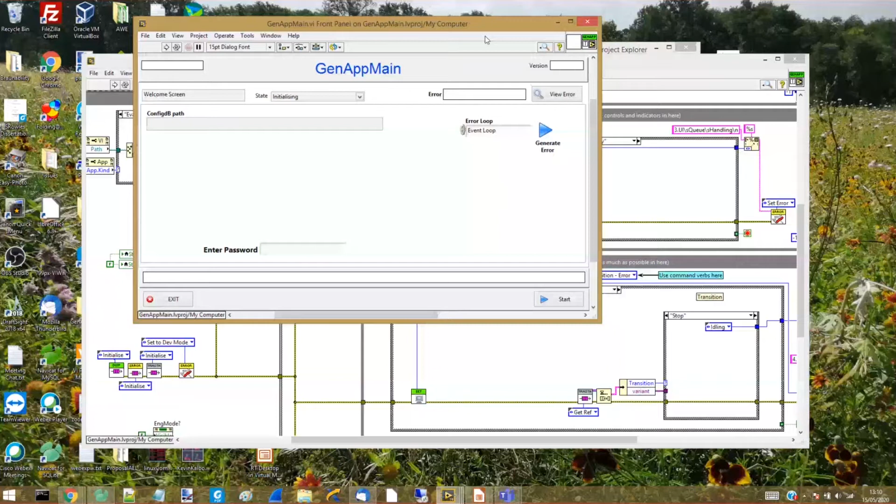Hey, demo time. This is all going to be demo now. I don't think I have any other slides. So I'll just run through the different bits of the code, really. So you start off with a reasonably small screen, just because I find small screens are easier to make bigger than big screens are to make smaller. So I think I'll just go through the various structures of it, and I'll probably then display, if I can, how this scales, because that's quite a common question I get. Oh, you're using standard LabVIEW, how does it scale? So I've got some very big applications which I can sort of show you.

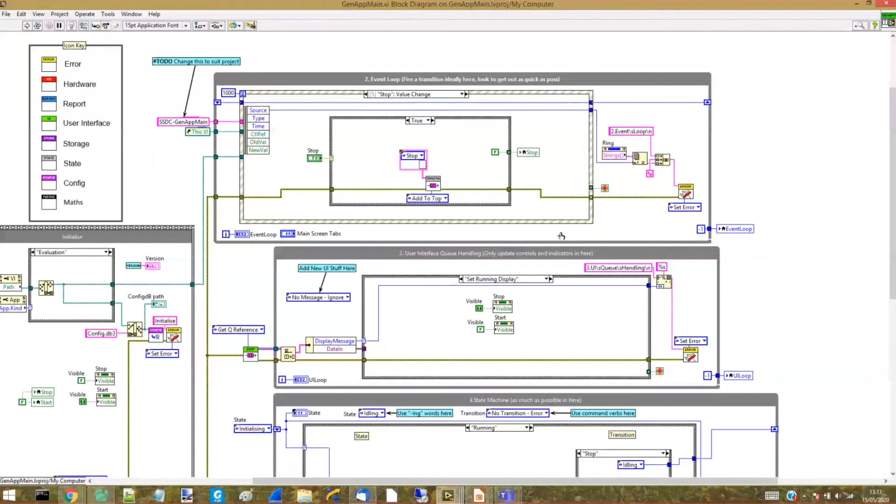But essentially, all of our stuff, we try to have common iconography. We try to keep the numerics. So these are just coding standards, really. Having structures with numbers on is quite useful for phone support, I find. The blues are kind of telling you what you need to update to modify.

I've fairly newly found that there were issues, so it's good to encourage best practice. For event loops, I think best practice is to get out of there as quick as possible. You don't want it hanging around in the event loop. Ditto the user interface queued message handler - get out of there as quick as possible.

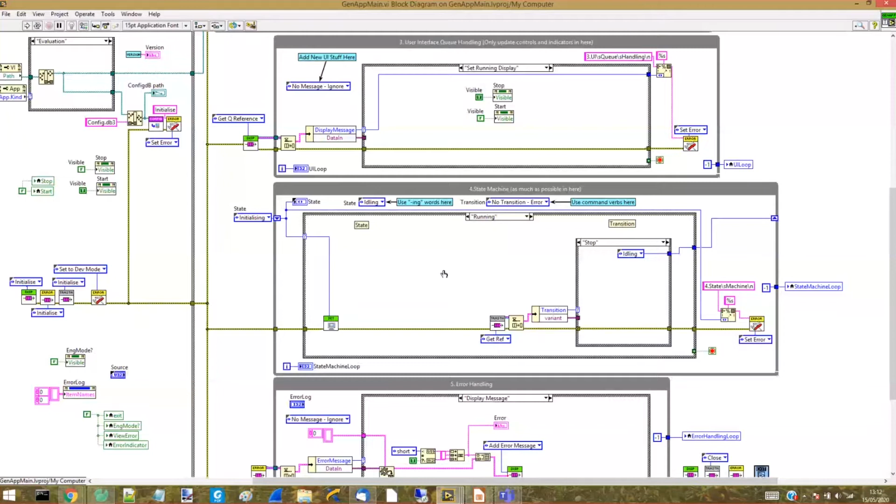And error handling just sits there as another queue. So you see there's 3 main queues here. There's a transition queue to come out of the state machine, which I talked about extensively at DevCon - if you're interested, go look at the videos, or I'll talk about it in a minute. Error is just another handle errors, and the display queue is just another queue. If I look in there, each one of those is structured the same.

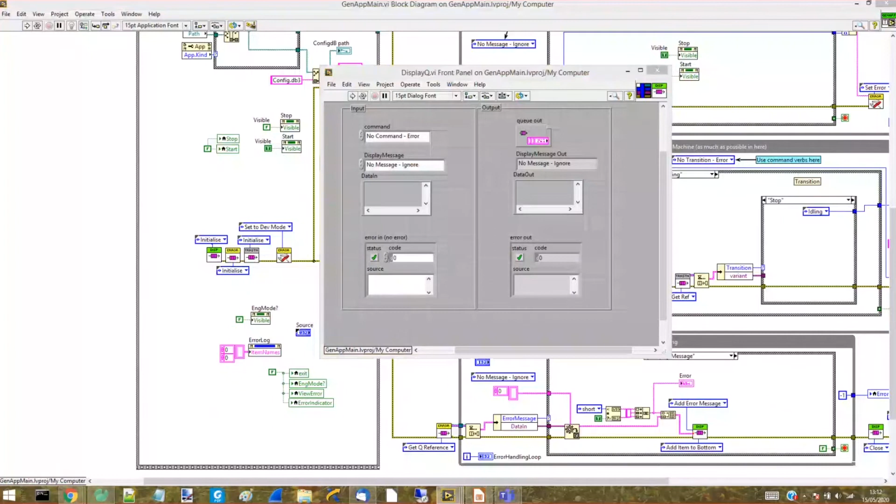I don't like seeing references on the code, so all these references are wrapped. You can see this is just doing queue stuff - all I've done is taken the queue prims and wrapped them up. So you can see here I try to minimize what references are around. To my mind, they clag up the block diagram with information you don't care about.

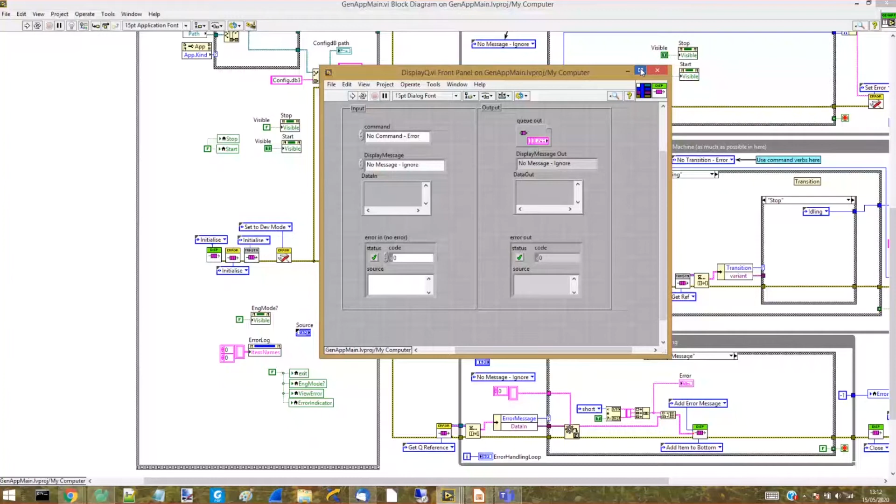So again, I'll do it - actually it's a working demo. Let's have a look at error handling first, because that's kind of vaguely interesting.

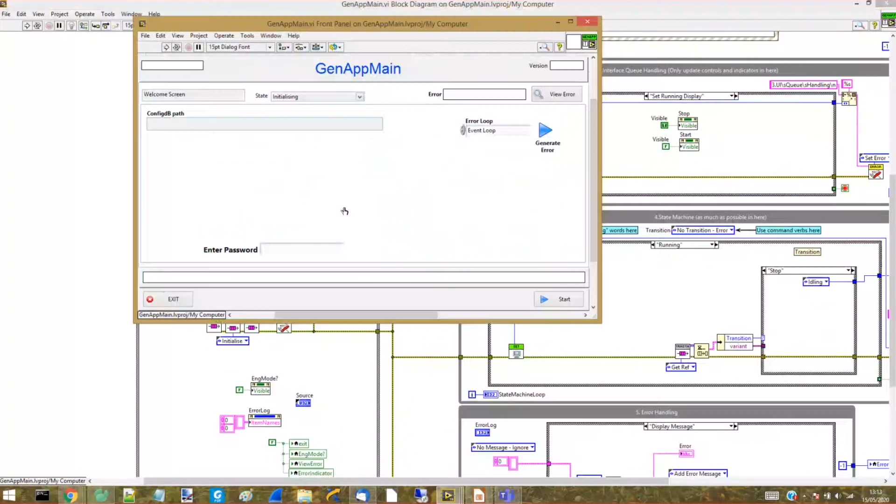So if I run this, that is our SQLite file. Our SQLite file handles all configuration and error logging. And if I press generate error - these are just fake errors essentially. So if I generate... right, there we go. You have to have an error come up, so you can view the error in a minute.

So I fired three errors off - actually I fired 4 errors off. I just give you the time of the error. But you can also have a look at the error history - these are stored away in our SQLite database, which I'll show you now.

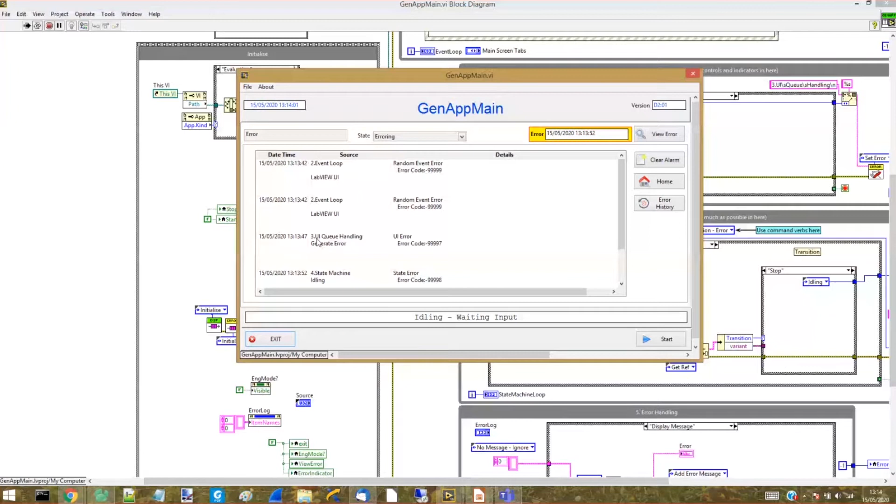I use Navicat to look at SQLite, which is cool - it's a cool tool. There's our error log. All I'm doing is taking the error number and its source and just totting up the number of errors and the most recent error.

I always think it's a source of extra memory leaks if you actually log every error into a file - it just keeps increasing. So what you actually need to know is, -99999 is throwing up 50 million errors, it's doing it all the time. That's all the information I kind of need. And it can be doing this in the background all the time as well, which is nice.

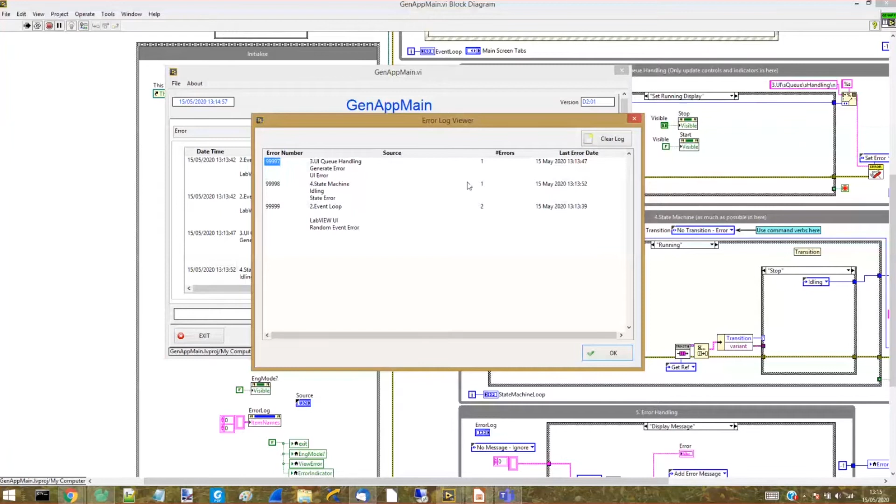So you can clear the alarm, and go back to where you came from, and that one actually clears, looks at the error log. This is actually pulling it from the database, so this is immediate, and this is forever - so until you clear it. And I'll clear it - it's all gone. So all that functionality is in there.

I'll show you that in a sec - actually, no, let's show you it now. Let's do configuration next, because they're fairly related - I can get both of them out of the way quite quick. So again, configuration, SQLite.

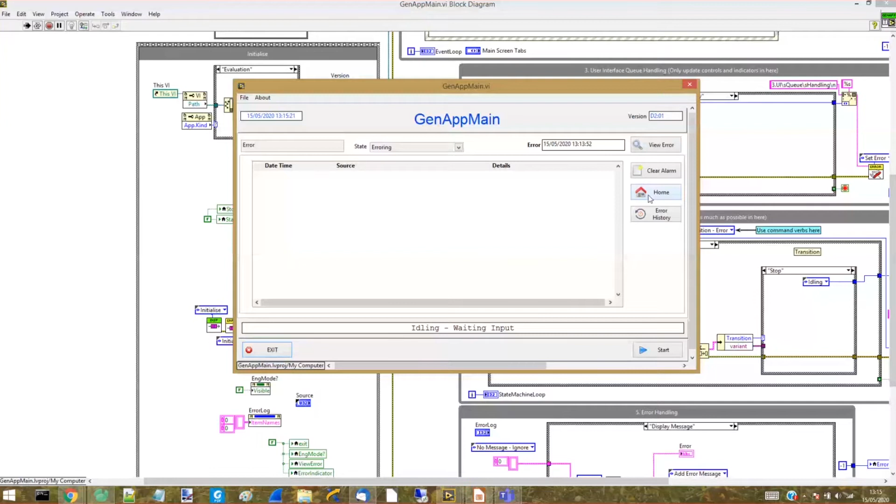You get the user interface - it's a bit of a clunky user interface, but it's all right. And the good thing about using a database for your configuration is you can have versions. It's nice, because it means you can do quite funky stuff like have different hardware setups, for example. Just load versions in - you select your version, lock it, that's always going to be the version that's used. Save it.

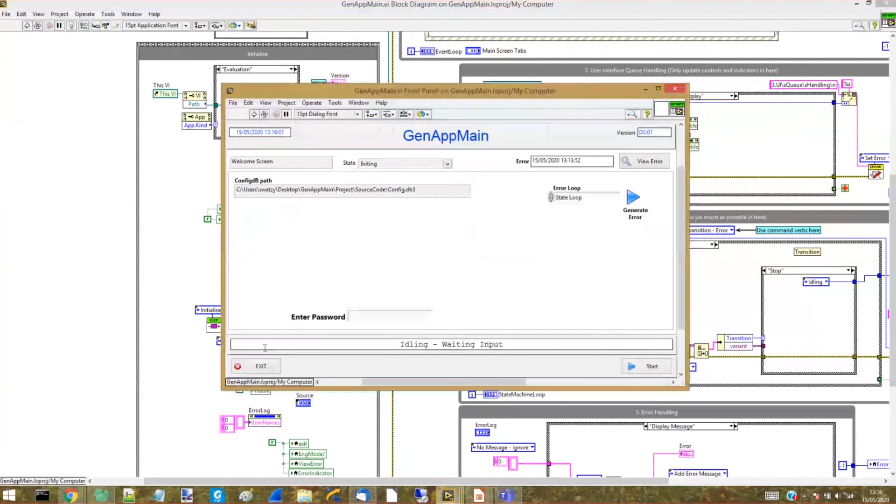The other usability aspect of this is - let's kill this code. You can actually then go. So if you want a new parameter, just open the strict type def and add a new parameter.

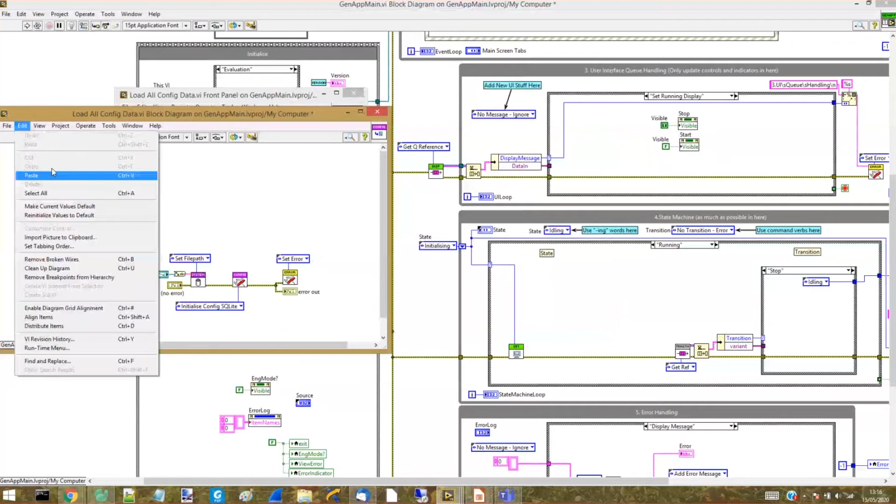So I'll go into here, I'll go save as because I'm adding a new one. It should give me a new version - there's a new version put in. I lock that, press OK.

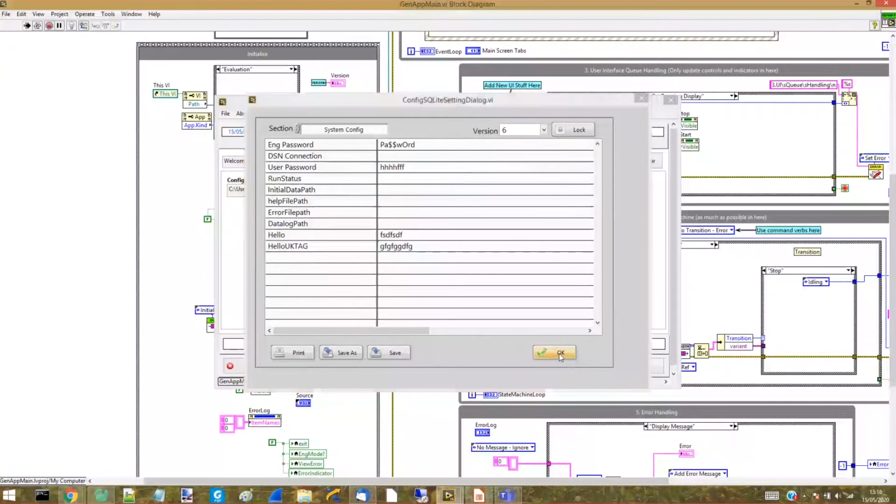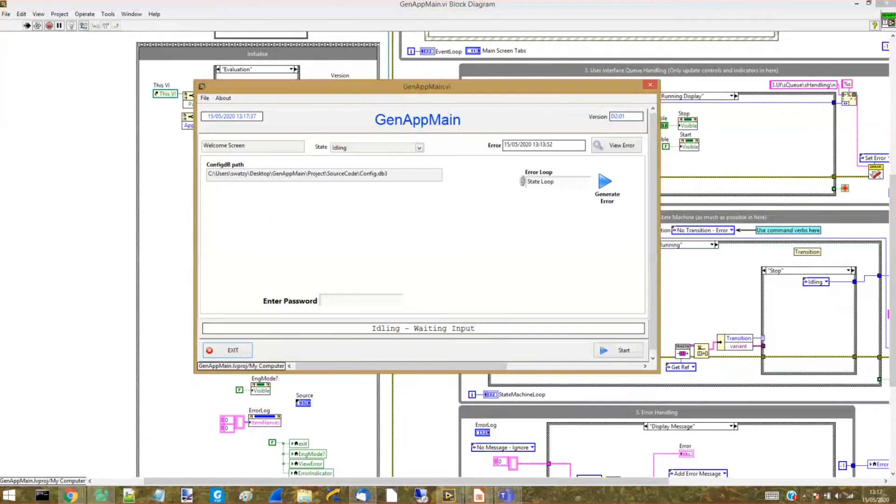Database... no... somewhere is... oh, there is there, version 6. UKTAG - so that gives you kind of, it's like a config ini file, but I find SQLite to be very much more robust and more transportable and stuff like that. So that's configuration - that allows us to just chuck up new bits of configuration on the fly, which is, you know, if you've got constants in your code, it's quite a good idea to make them configurable.

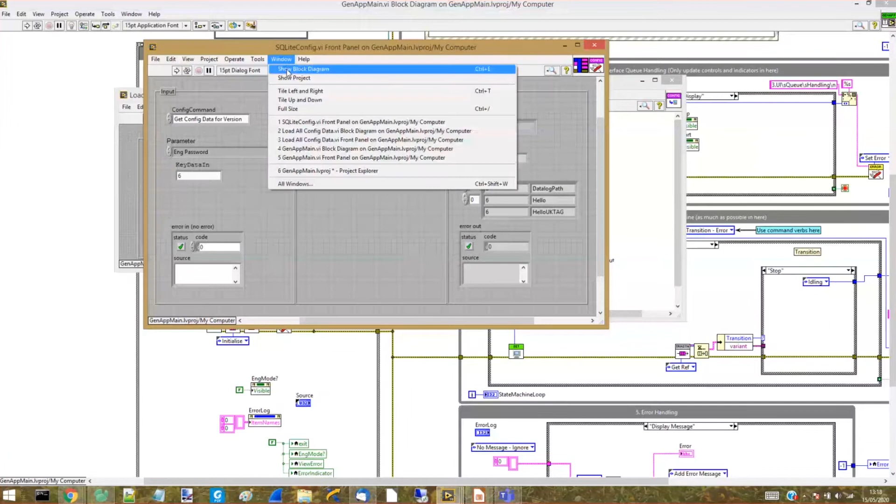This is essentially our database stuff. Again, this is fairly high level. The abstraction is more to do with the template than it is to do with databases.

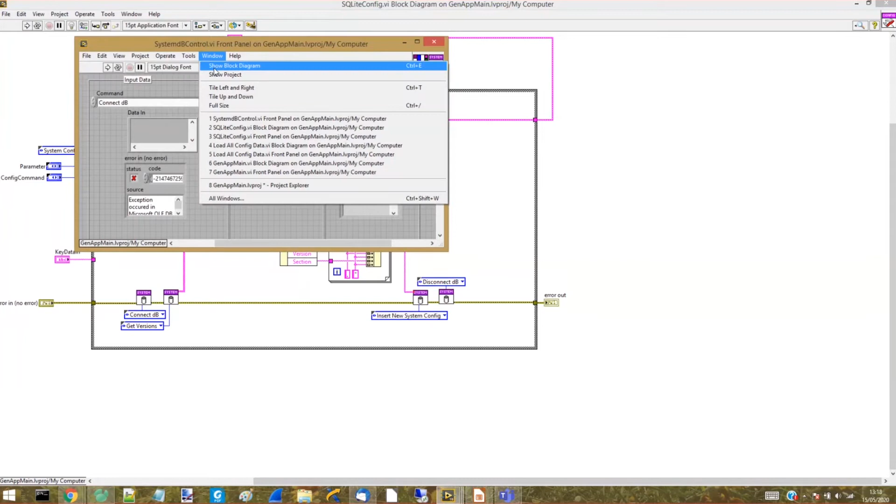Let's get a little bit more databasey, so we dig down a little bit deeper. I quite like doing these kind of things. SQLite is good, there's good documentation for it. And here's the actual SQL. So here we're doing SQL inserting.

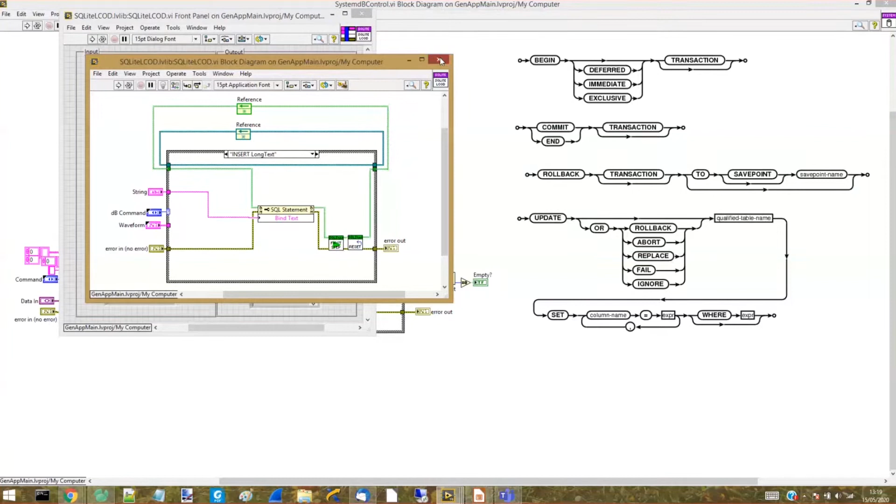This is using the final layer before we get into actual driver code. This is using James Powell's tool, SQLite tool, which is fantastic. You can see here it's actually binding it to the text, so it's doing binds rather than SQL. That's just because it's a blob, because it could be big, and it's also got error details which could have lots of characters you don't want, or if it's a SQL statement that causes the error, you don't really want to embed SQL statements in text, so that kind of thing.

But other things don't use that. I try to always go for the most simple way of doing stuff, so select all. It's all reasonably standard.

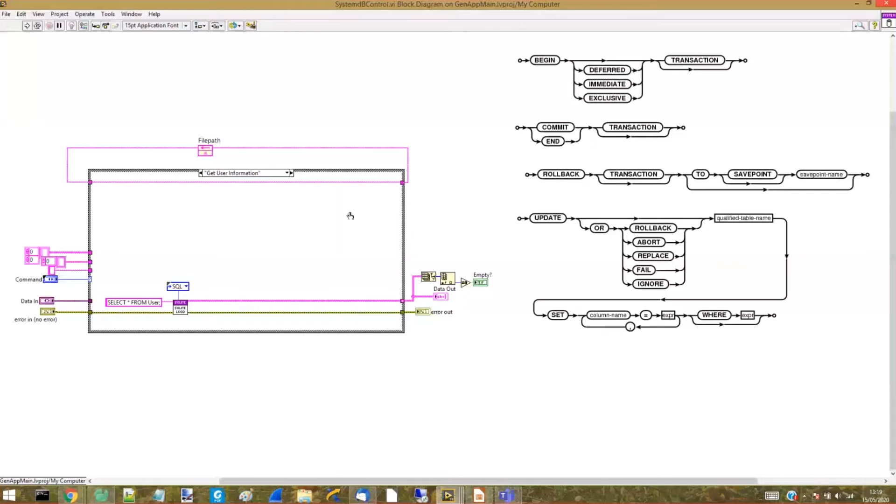So that's configuration, that's error handling. I've done the two most complex things first actually, so that's cool.

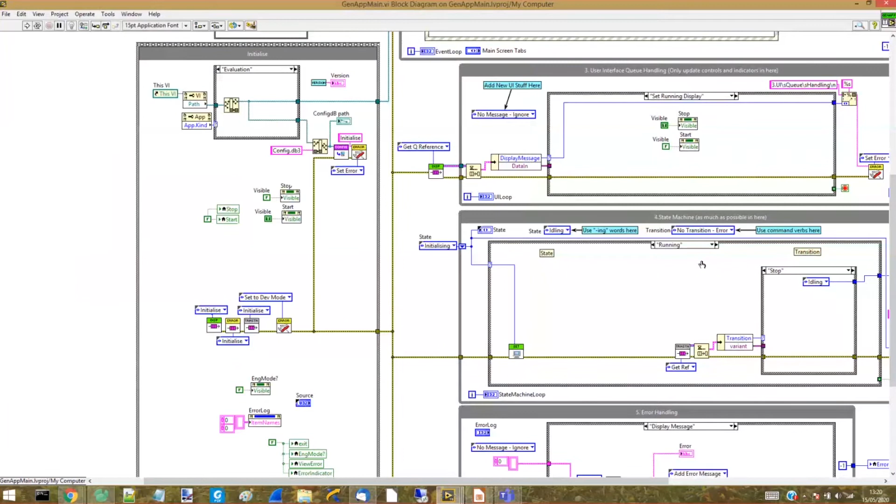So why would you queue up all the user interface stuff? Let's talk user interface stuff. So what's the point of that?

So here, again, I like enumerator types, so you'll see lots of that. Here I'm setting my display, for example, to idling or running. So you set running, all I'm doing is making the button visible. That's the only thing it's doing currently. But that could be a generic thing - you could be flipping a tab, which is a common thing we do, to a running screen.

But if we play this here, I press start, stop. What we're doing, you should see me.

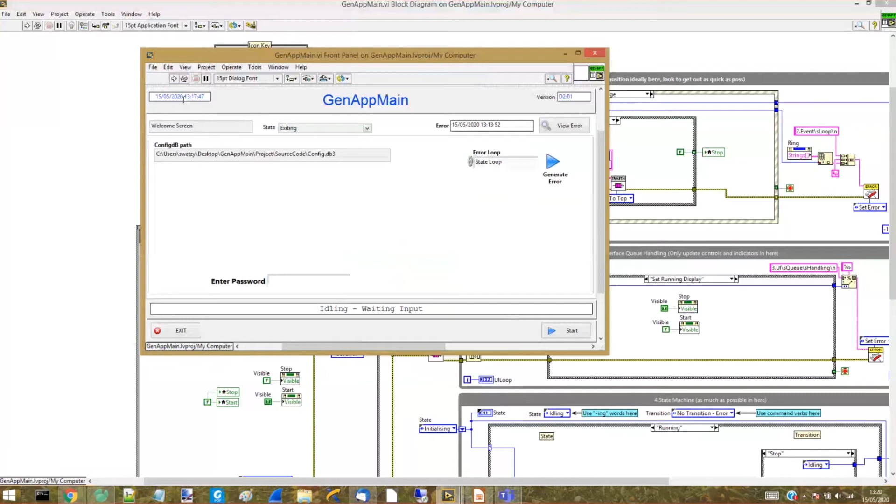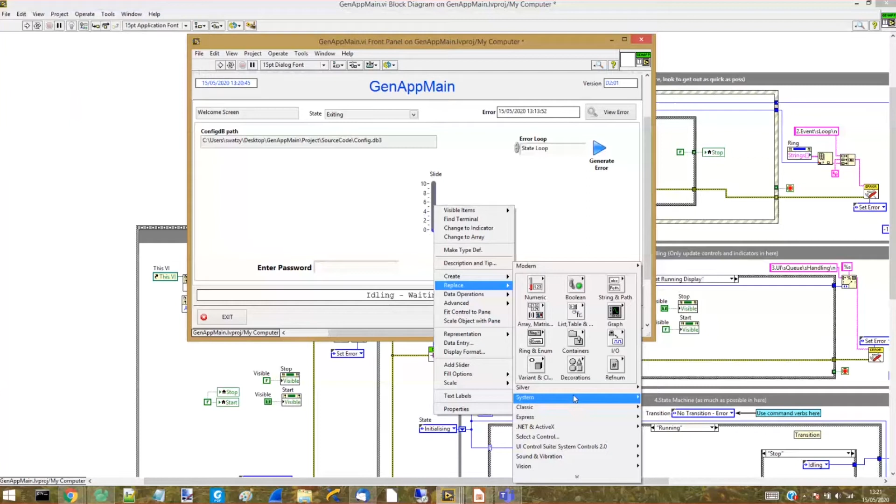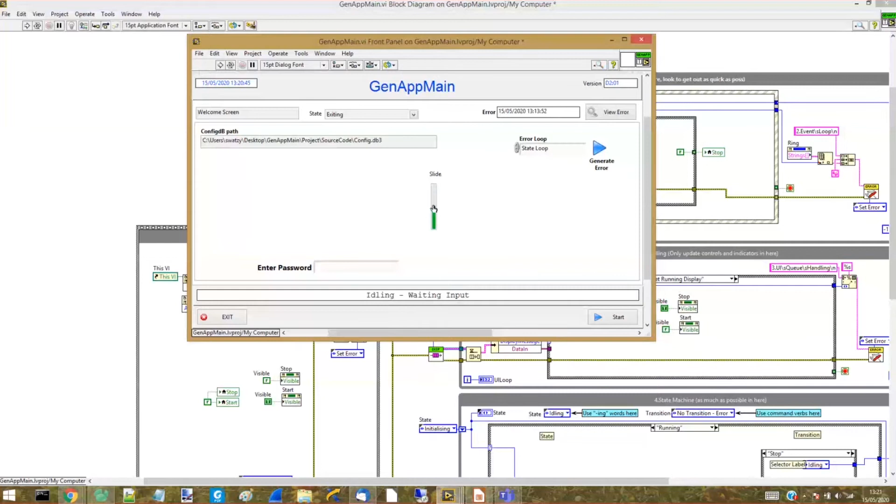Okay, so we got a new indicator, which is slide. So what we want to do is update that. So I would go the simplest form. I don't like this because auto cocks up in a normal way - my muscle memory works, apologise. So let's go set slider.

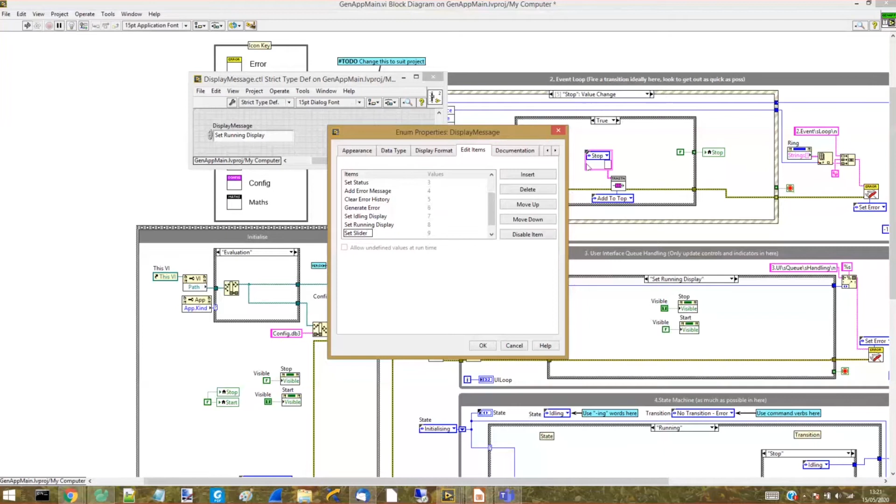And as we're going to set him to a number, let's just go and copy something that's already got there.

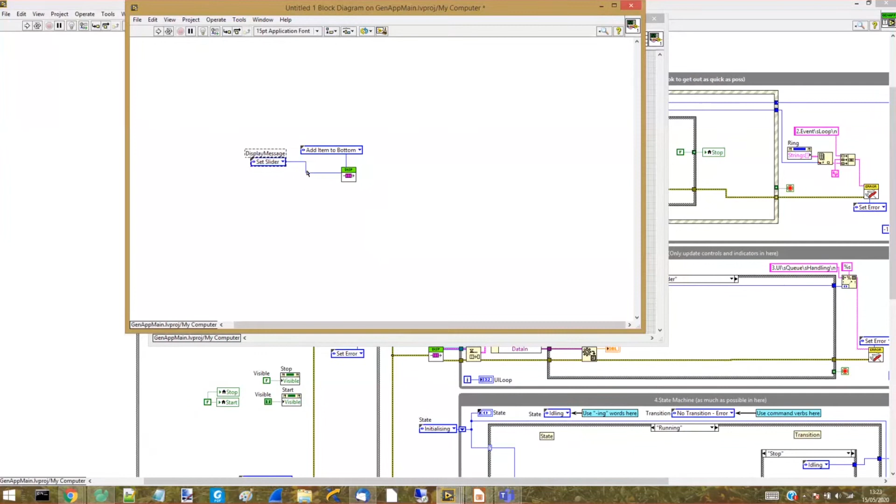I find this quite valuable when testing displays, so this could be in any old sub-VI, anywhere in your hierarchy. But now you can just test that your display works. That's as easy as that. It's cool.

The other nice thing about the queue template is you can add to the bottom or the top, so your stops get added to the top. So you just say, right, I'm out of here.

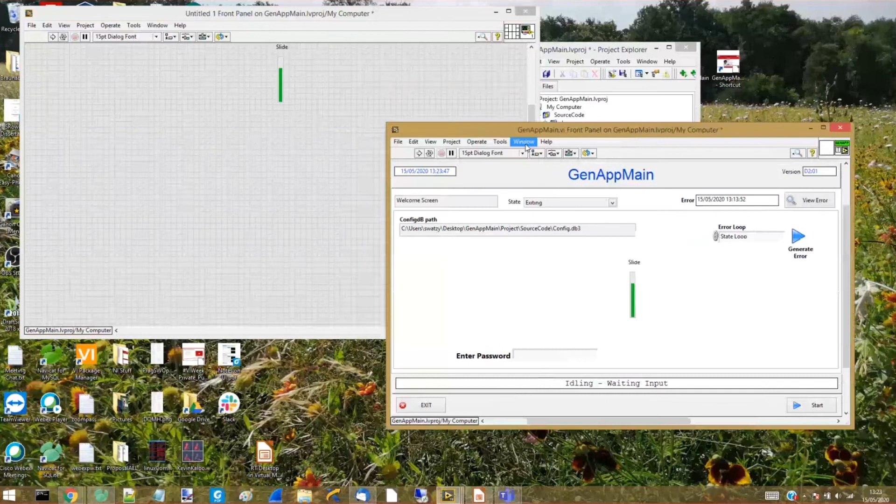Okay, state machines. So you can see I'm very keen on state machines. I'm very keen on having it tell you what state it's in. I find it very much easier for me. So I've got the state up here. You can see I'm very keen on the language of state machines, and that it should be idling. That tells you precisely what your system is doing or what the module is doing, because state machines can be...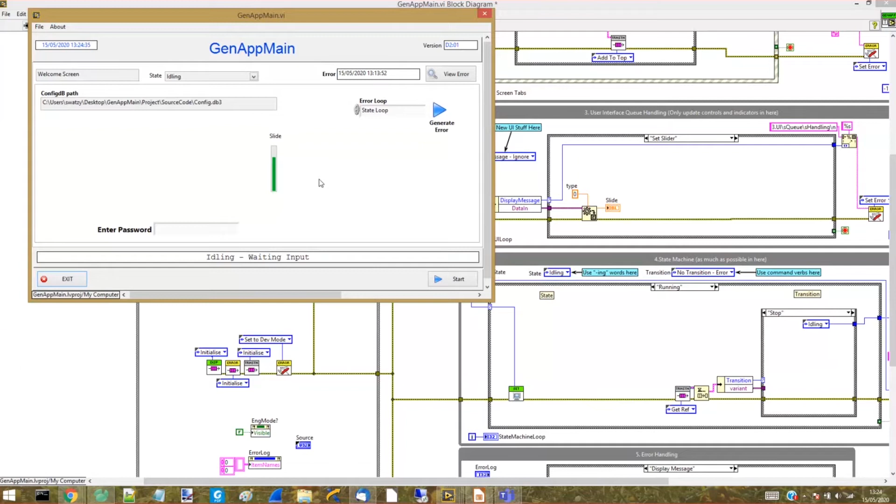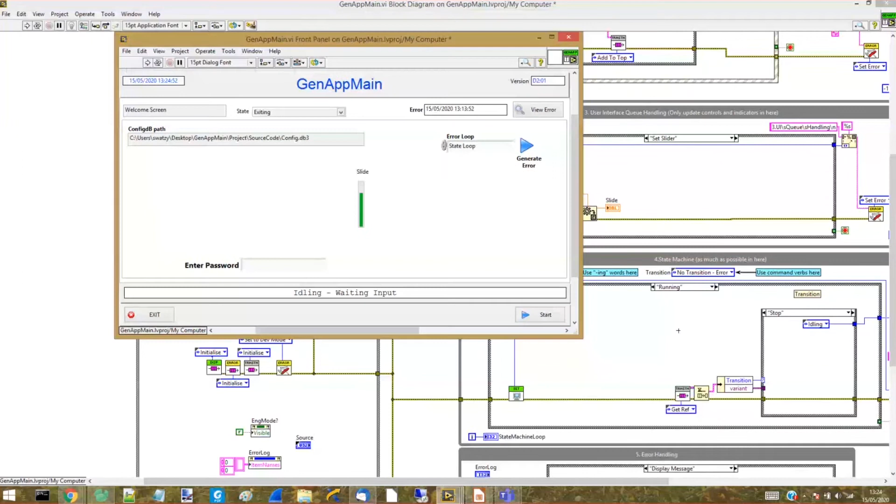...sub-VIs as well. So here I know it's idling. Now if I press start, I know it's running. So it tends to lead your mind into the correct place. Now what do I have to do when it's running? It tends to, what I'm trying to do, is force my brain into thinking about the things that are happening at that one small moment in time. It's a way of managing complexity - rather than thinking about how the whole program's running or working, I'm only doing it in one small bit.

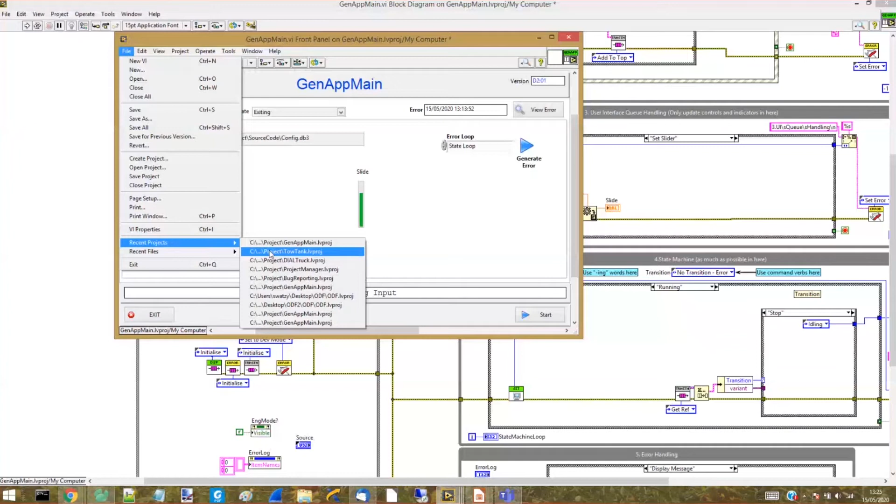So, I think that's all the ins and outs, all the technical aspects of the code. And you see it's not very big. Let's have a look - so if we get rid of the driver...

The other thing it comes with is transparencies and things like that, splash screens and all the frivolities that you can have. If you take out the actual driver, there ain't a lot to it, which is nice.

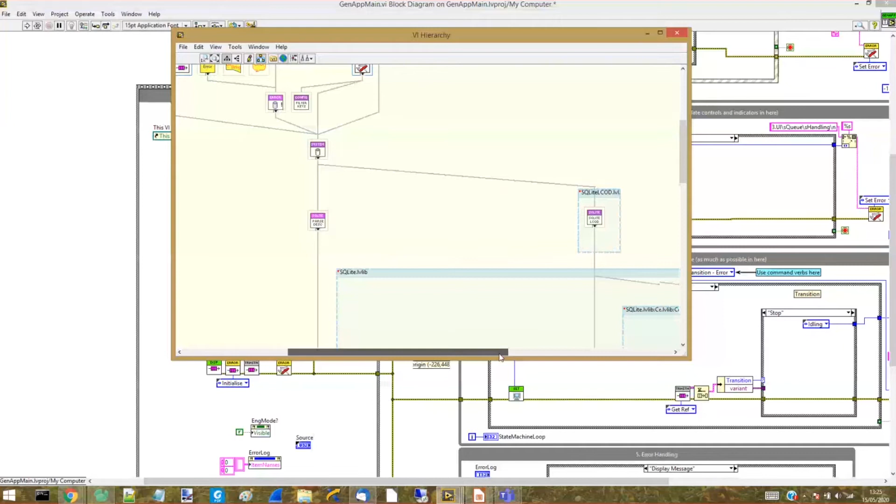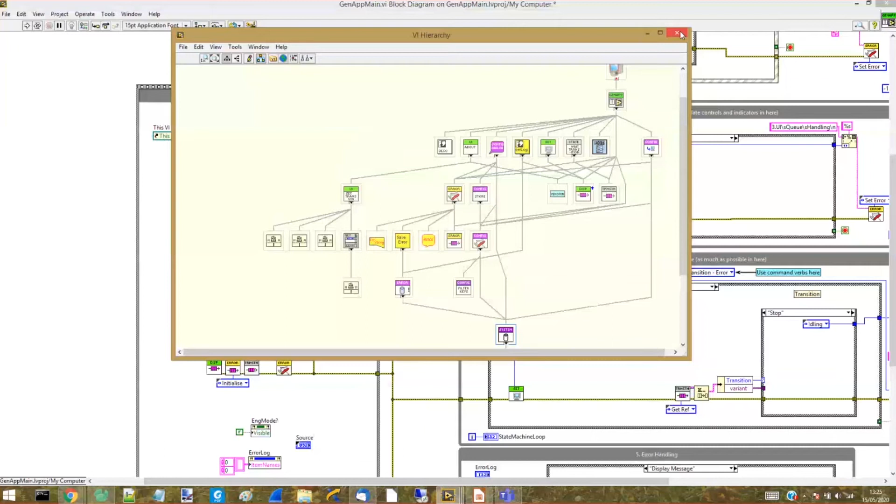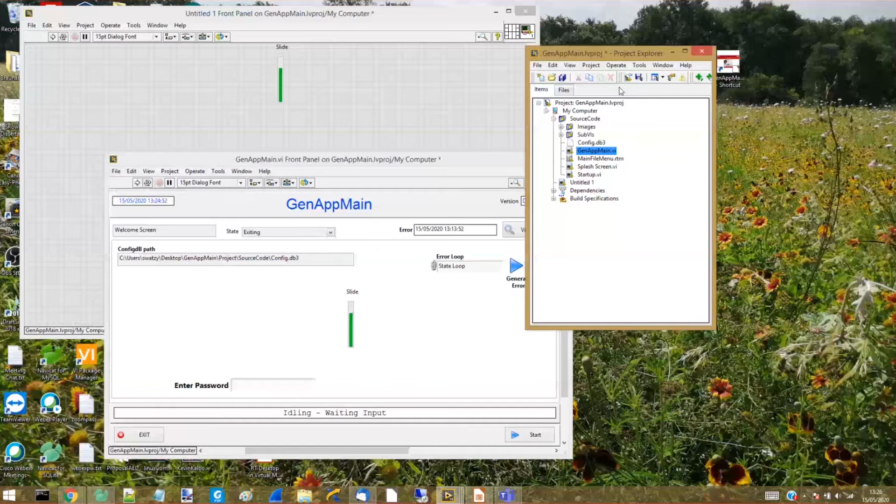I've recently stripped it quite a long way back. The other aspect is it's completely portable, so you can move this to any directory, chuck it on any machine, there's no dependencies. It'll just run, and that's important. There ain't no dependencies apart from the VI-lib, which you can't get away with. But I'm not a great fan of dependencies.

This is another rule I break that seems to infuriate people. I don't really care - I quite like infuriating people - but I like to see when shit changes in my project, so I always have it directly mapped back to the file. I'm always auto populating.

But if we go into there, there's James's stuff. So every single project I make has that embedded in it, and I tend to do that with drivers and everything. So hardware drivers, if I can, I'll embed them in the source code. And all I then do is park it up to one repository for the project. The aim is that if I just gave my repository to anyone and they loaded the right version of LabVIEW, they could just download it off the repository and it would work.

Now obviously, with, I don't know, if you've got a Keysight scope for example, that's next to impossible unless you want a 5 gig repository. But it's an aiming point.

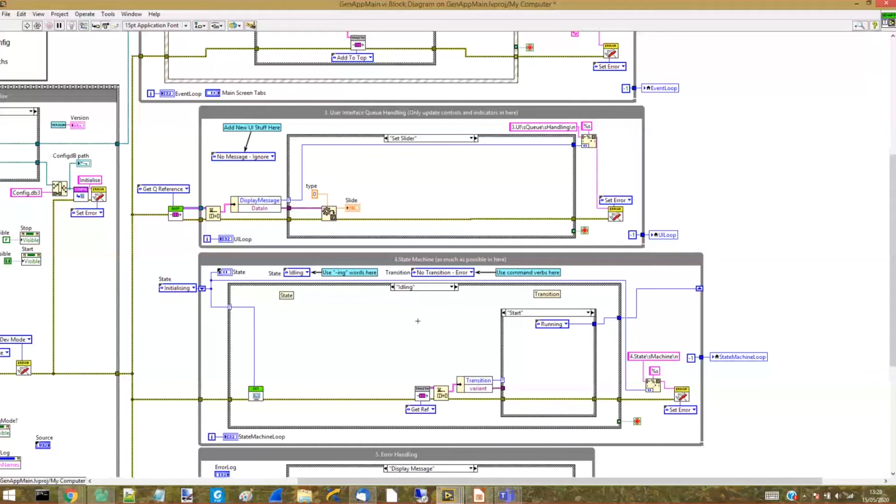The only annoying thing I find is that over time these just randomly expand. I'll try to fix that one, but it's a minor thing. Apart from that, that's well.

So I was going to show you something a bit more complex now, because of the interesting way that Measurement and Automation Explorer deals with - can't think of my words today - deals with instruments that are imaginary. I may or may not be able to show this. Oh no, it's going to work today. Nice. Simulated, that's the word, there you go.

What it does is it changes the name of them. It's very peculiar.

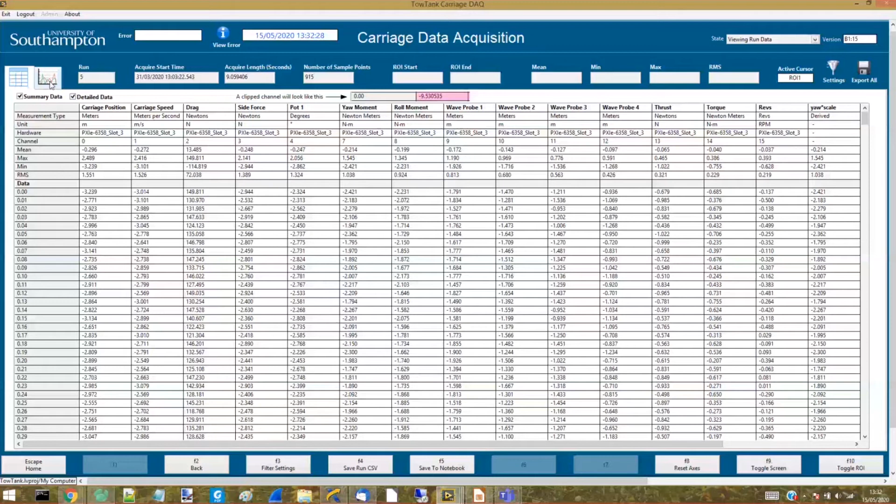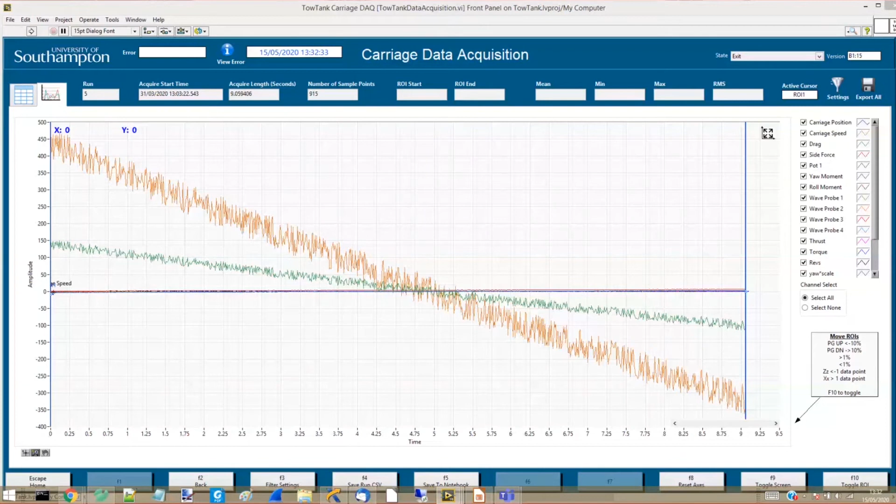So this is a big ass piece of software now. I'll just show you the code - you'll see it's following pretty much the same pattern as I showed you. It's bigger and assier, but it's still there - event loop, user interface queue, state machine, error handling. Certainly the same structure, it's just bigger.

The other aspect is if you want to do a real-time system - I'm doing this on the fly, so if this doesn't work, I'll just switch the machine back on. It has a habit of changing its IP address. Beep, see if it works. Oh, it does work. Cool, where is that? Wake up.

Right. I just want to show you some code. So this is a real-time server when it finally boots up. As a headless real-time server, it doesn't need the event loop. It doesn't really need a user interface queue. But it does have inputs and outputs. And you should really think of the event loop as an input and the user interface queue as your output.

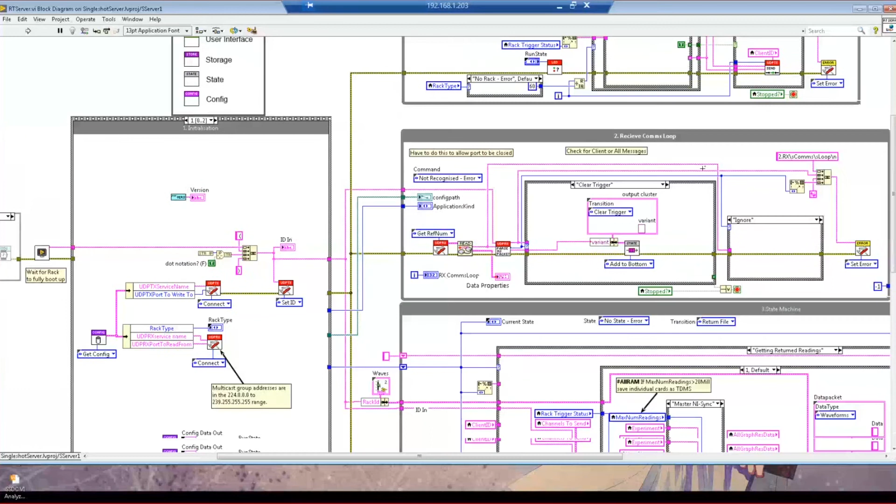So here, that's replaced with receive comms, which is UDP. So it's the same structure. It's just transmitting its watchdog. Yeah, so there's the display handling, and it actually still is doing a bit of UI stuff because I want to be able to see the stuff, but the actual output is there, which is sending data. So that's queued up as well. And that's it really.

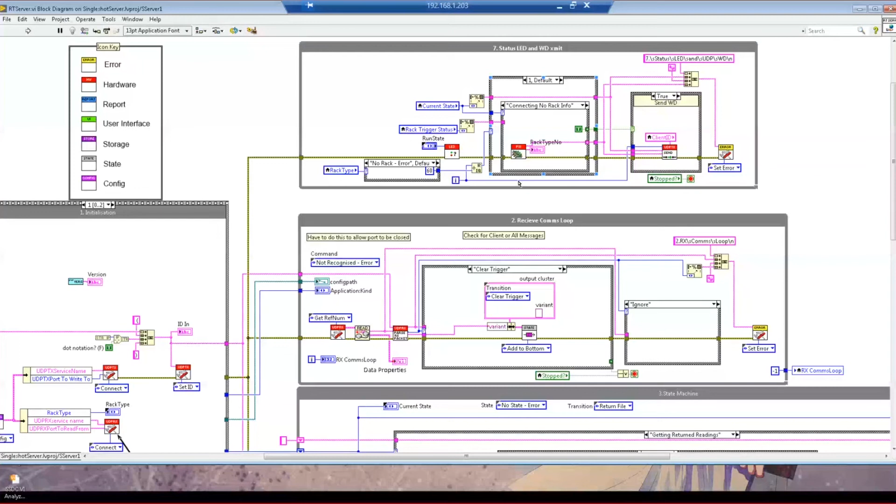So you see you can replace the structures quite easily. The actual lightweight feel of it is still the same, and that is a really massive program. That state machine is huge. I'll show you the diagram, shall I? And that's it. I think that's fulfilled my remit.

Steve, I had a question for yourself, if that's okay. Kabul, by the way. Yeah, hi Kabul. How are you doing? I'm good, thank you.

With your example you were showing just now about having all of your dependencies, so drivers included, into your project, we are doing something similar at the moment. And my question for you is, you use auto-populating folders. So if someone has got those drivers installed in the computer, do you not get naming conflicts? I suppose an example is FTP. If I load up my project manager, that's got FTP stuff in it.

And I have to say, I do a really brutal trick, is I just stick it in a library. Yeah, I was going to say. Protect the namespace. So for instrument drivers, I remove them from the instrument lib because I don't believe that they should just be sat around in your environment. So they get removed and moved. Now, for example, the National Instruments Modbus drivers, they don't design them to be portable. That is a real pain in the ass, but it's effort we put in.

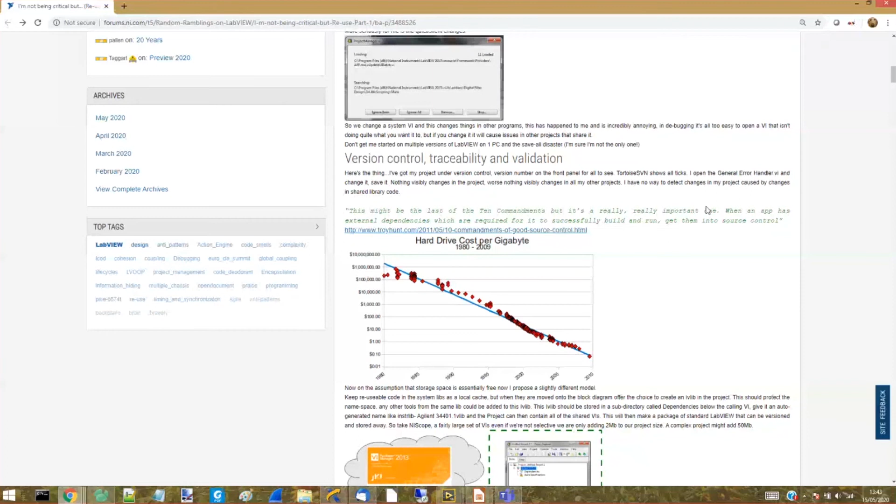If you scroll to the kudos on that, did Petru end up giving you kudos for that? Oh, I don't know. I've got 5 kudos for this. That might be the reason why we've had many conversations around this. No, Petru, he needs to. I think it's because I highlighted he was putting kudos on. Sorry, Petru. I'm the worst enemy. Yeah. But can we all give Steve a kudos for that? I agree with most of the things. So let's make that 5 into 35.

One thing is, I don't know if you guys have used GPM at all. GPM kind of deals with this in a slightly different way, but at least it does install it into your project rather than vi.lib or instr.lib. So that's one thing that I think I'm sort of gravitating towards. I haven't looked at GPM yet, and I really ought to.

I did ask Michael Aivaliotis, who is not part of this now. They said, "Oh, what can we do to make it do that?" And I said, "All I want you to do is give me a path that I can load my software to." But the trouble is that people have been writing these toolkits to live in here, and they've not been making them movable. So if their toolkit has 2 directories, they put the directories side by side and not hierarchical, and then when you move them, they just get lost. And that kind of thing is very frustrating.

Very frustrating. So the one thing with GPM is it's a very useful tool. Last I checked, it is an open source project, but it did not support localized repositories, so it was all in the global repository as such. Yeah, if anyone can get onto that, that would be super useful.